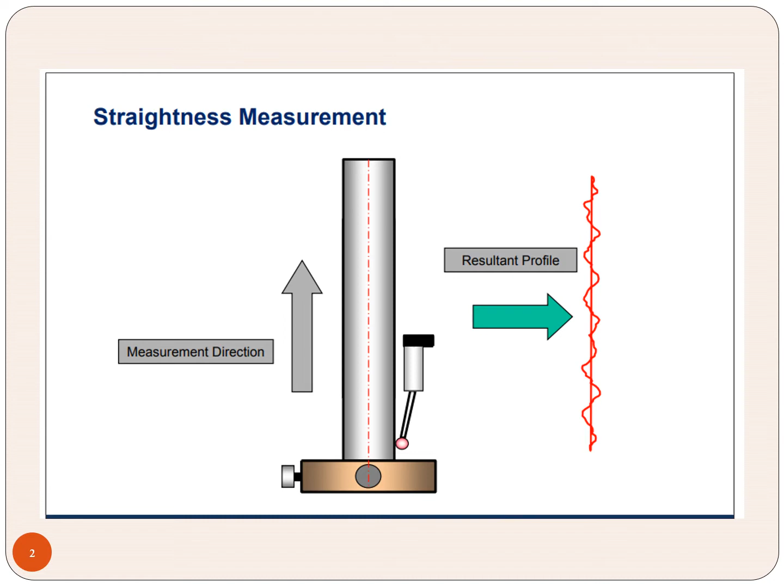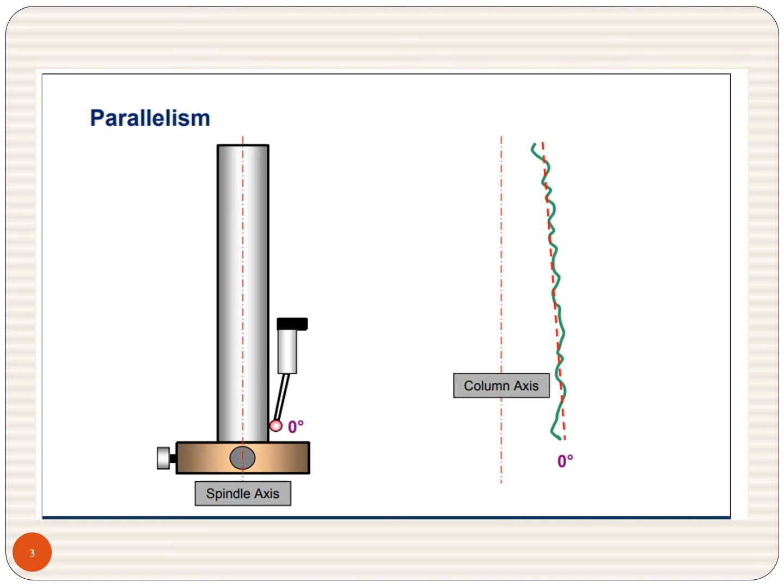Similarly, look at this parallelism. It is a single side parallelism. In the next slide, we will be seeing double side. Here also, by using the stylus, we are moving up and down, and we are checking that it is not parallel. The error is there. The spindle axis and the outermost contour layer, that is the circumferential contour layer, differ by 1 or 2 degrees. So that can also be measured by using this method.

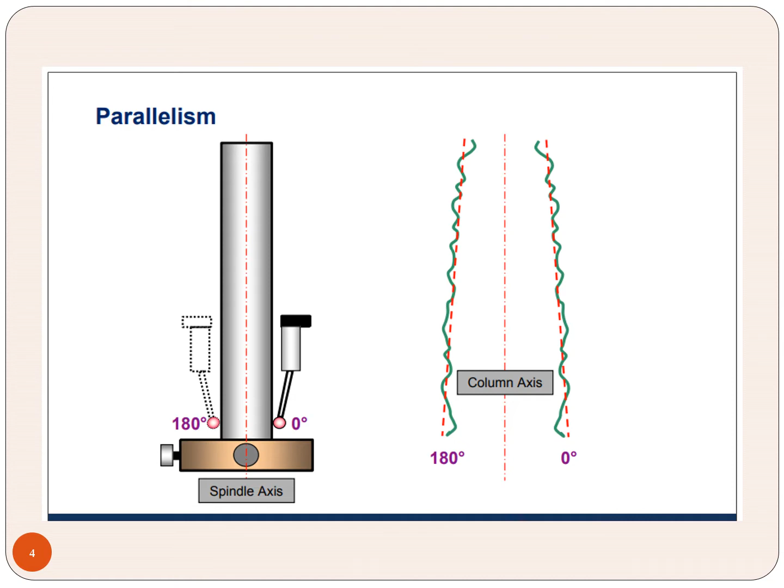This is double side measuring of a cylinder, and we are finding the circumferential error. So the parallelism is not there. Even for cylinders, we have this much error. If you are going to make gears, the gear teeth are manufactured using the machine called gear hobber, or in a shaper also we can do it. Mostly we will be using the gear hobbing machine to generate the gear teeth.

For making the cylinder itself, we have found the straightness and the parallelism have some minor error. Look at the formula for finding the parallelism: D1 minus D2. Maximum minus minimum gives the parallelism error. That is, parallelism is not perfect. It may be of 0.001, that is 1 micron. But that is negligible if it is within the tolerance limit.

Even for a cylindrical rod, we are measuring the parallelism and the straightness. Why don't we measure for gears? That is the question that arises. That's why we have gone for gear teeth measuring and checking the terminology of gears. Mostly we will be discussing spur gears.

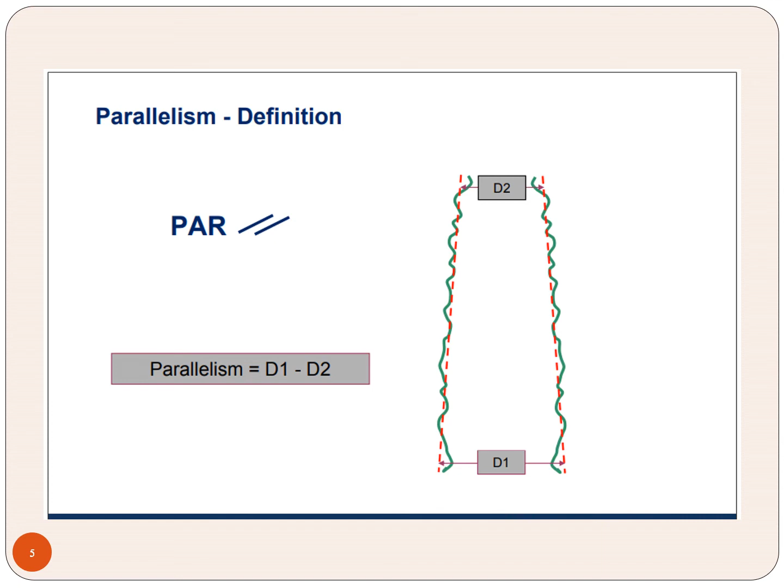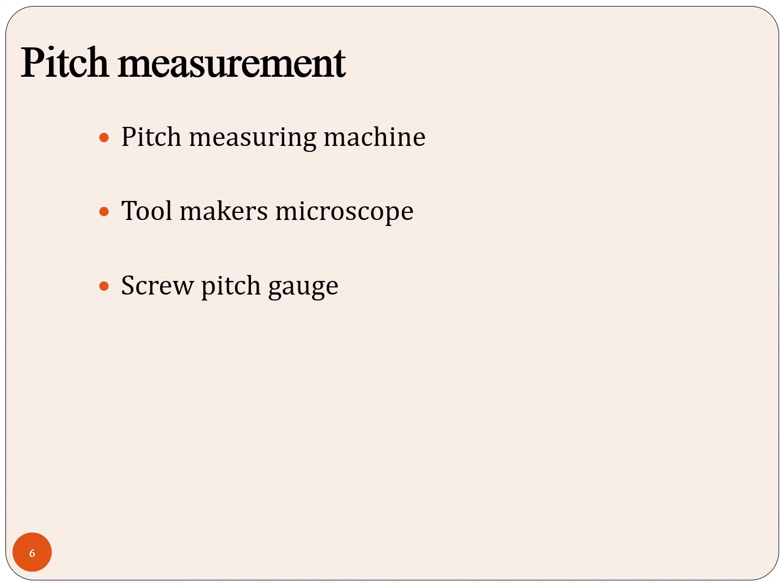So now look at this pitch measurement. As we have seen in threads, here also we have the pitch. We have the pitch measuring machine, tool maker's microscope, and screw pitch gauge in the case of threads. So this is called the pitch measuring machine. Now look at this. I am putting this for thread. Similarly, we will have it for gears also.

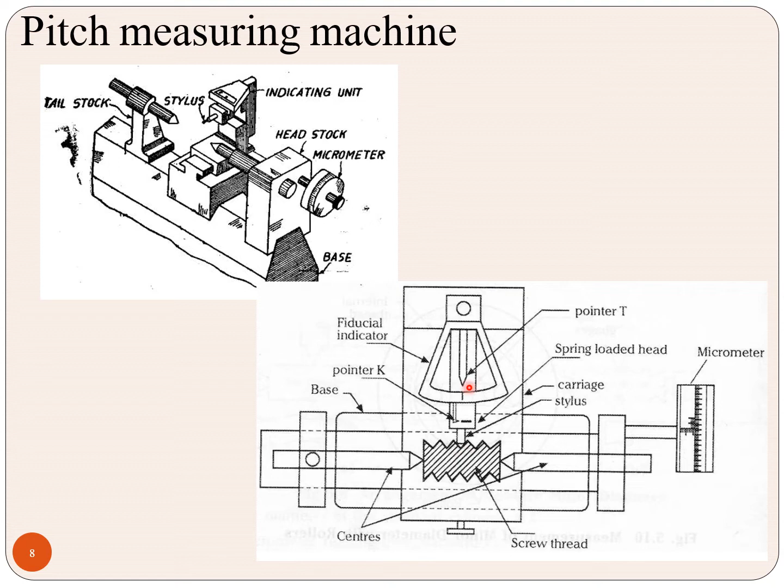This part is known as a stylus. This is the pointer. This is a carriage, and a spring loaded head. A fiducial indicator, and this is the micrometer. This is a screw thread. By means of the stylus, we are measuring the reading. This pointer will move, it will deflect. This is called the pitch measuring machine. Another one is the tool maker's microscope.

Worktable is placed on the base of the instrument. The optical head is mounted on a vertical column. It can be moved up and down. Likewise, like a microscope, workpiece is mounted on a glass plate. A light source provides a horizontal beam of light, which is reflected from a mirror by 90 degrees upwards towards the table.

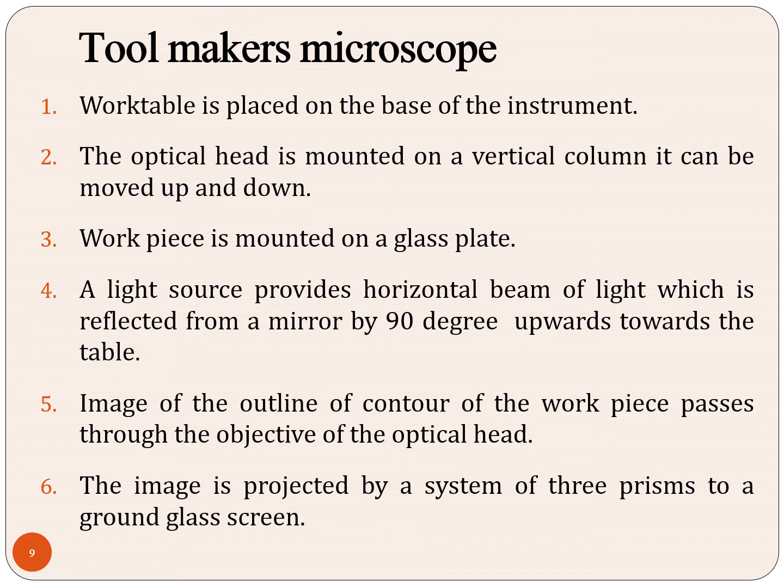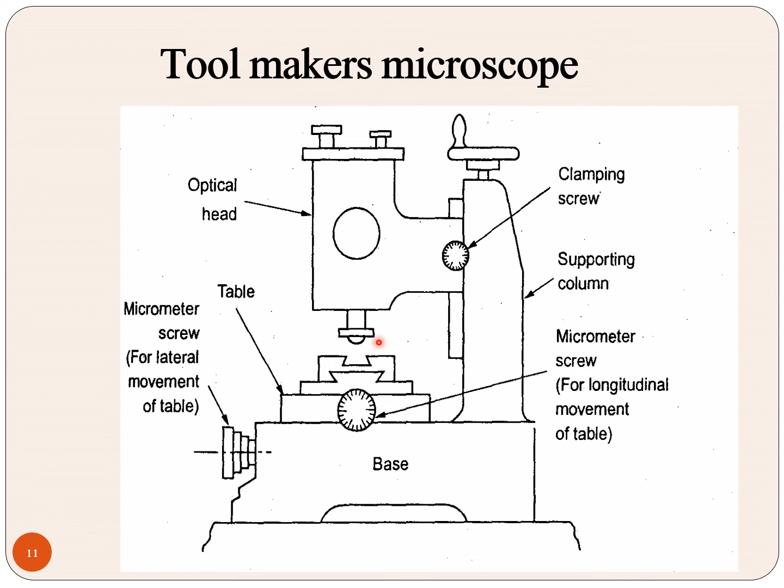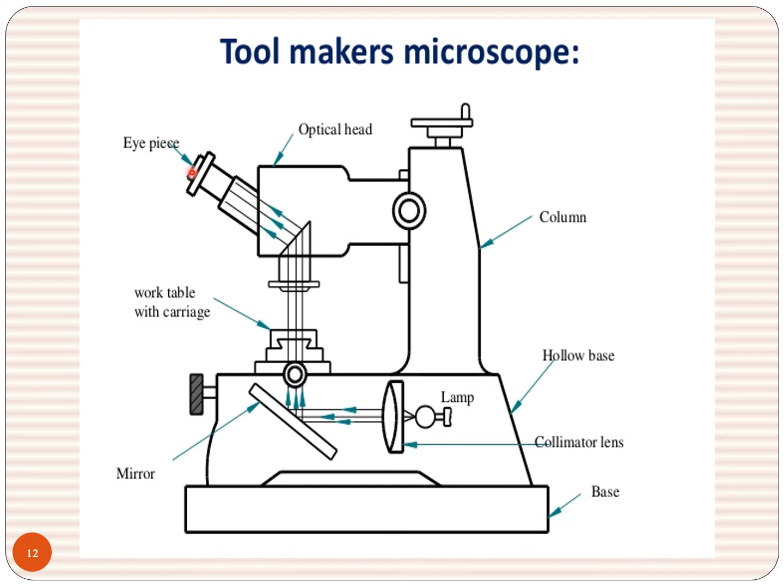It is also working in a similar way to the autocollimator. The collimator lens will make the beams parallel. From the lamp, the rays are falling on the mirror. From the mirror, it gets reflected, and through another reflector, we are viewing through the eyepiece. Then we will do the calculation and we will find the pitch. See here, look at this toolmaker's microscope, how it is going to work.

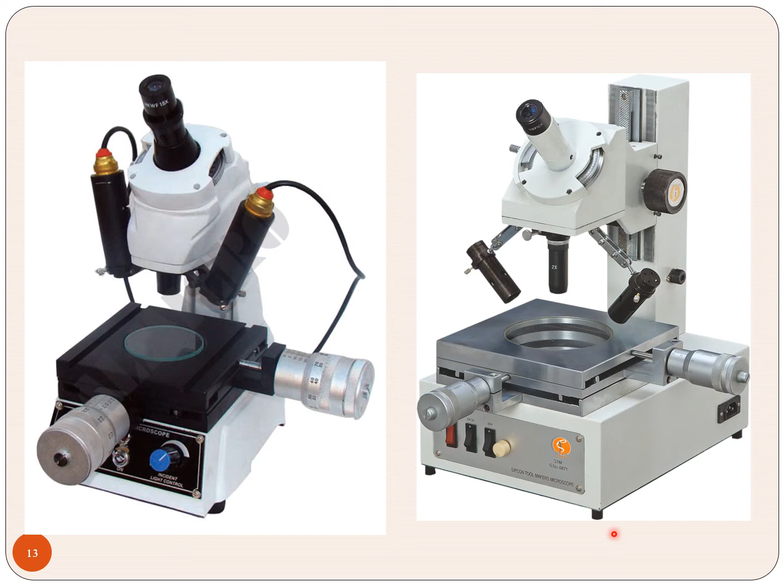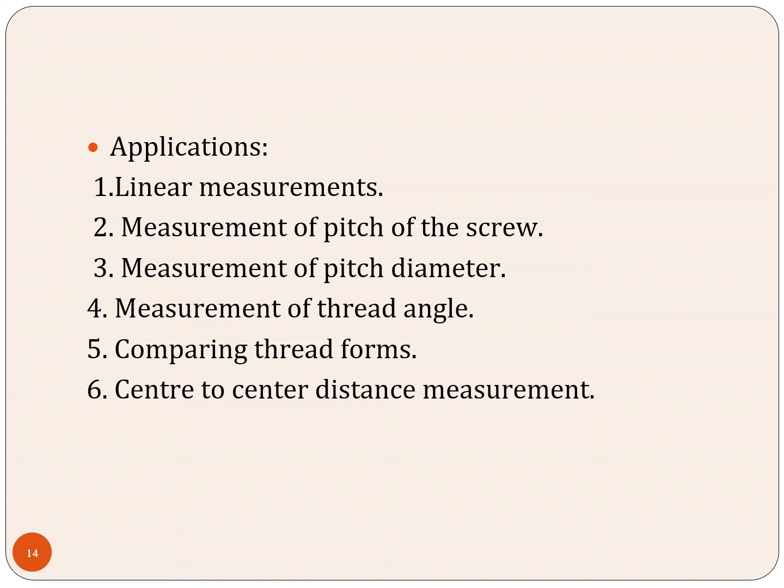The applications are to measure linear measurements, measurement of pitch of the screw, measurement of pitch diameter, measurement of thread angle, comparing thread forms, and center to center distance measurement. For all these things, we can have this toolmaker's microscope.

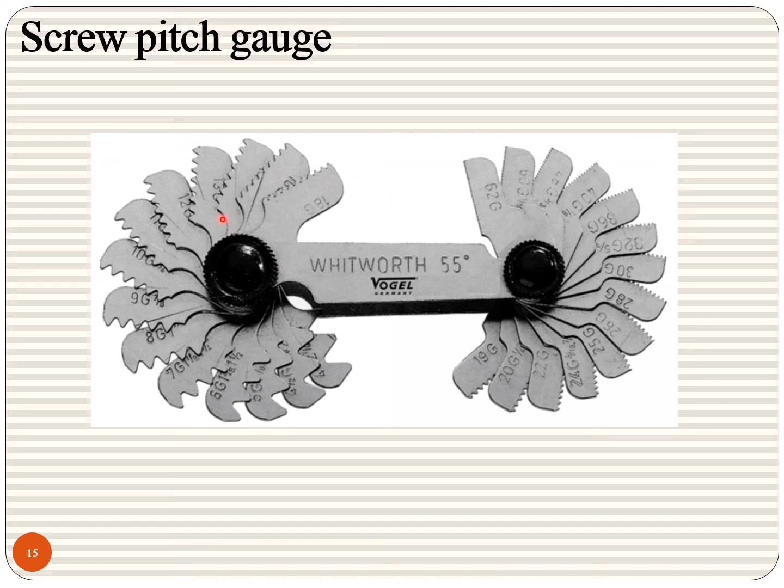Now look at this. This is a screw pitch gauge. Here we are having the pitch like threaded. So by using this, we can easily measure the pitch of the screw. Here they have put the marks 19G, 20G, likewise. Flank angle measurement.

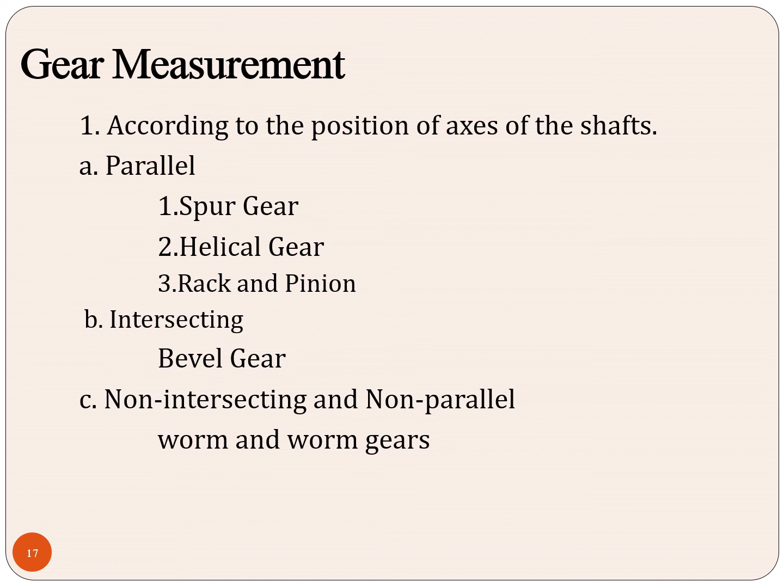See, this is gear measurement. Spur gear, helical gear, rack gear. These are the known things. Here it is a spur gear. If the teeth are parallel to the axis of rotation, it is called a spur gear. If the teeth are inclined to the axis of rotation, it will be called a helical gear. The gears are used to transmit power from one shaft to another parallel shaft. If you want to transfer the power to a perpendicular shaft, we will be using bevel gears.